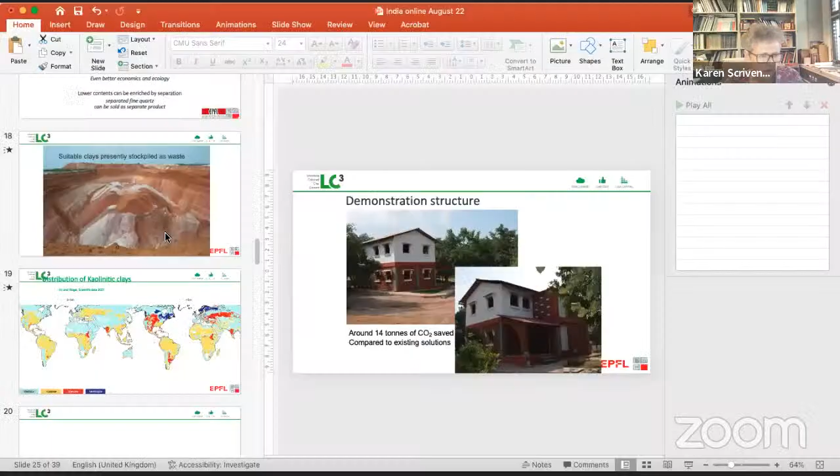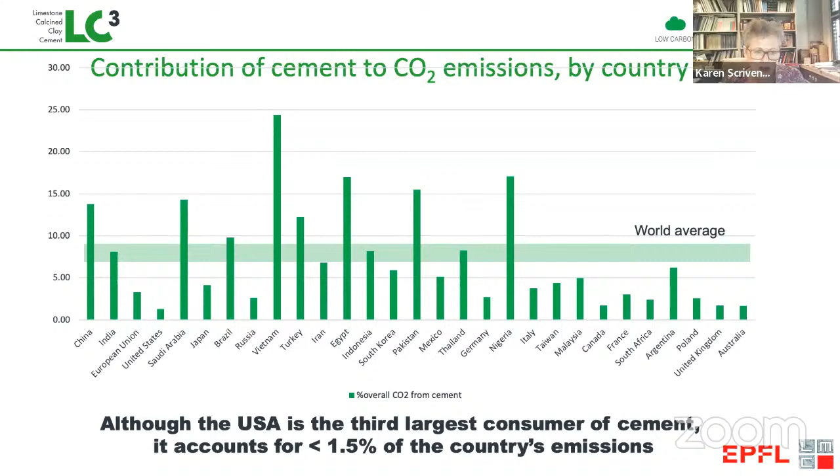So today, if we look at how much CO2 is coming from cement in different countries, we see India is pretty much near the world average of about 8%. But if this increase continues, and if, on the other hand, India is successful in reducing the CO2 intensity of its energy, then this share is likely to increase. Now, we can't do away with using cement in concrete, because concrete is by far the most used material, more than all other materials put together.

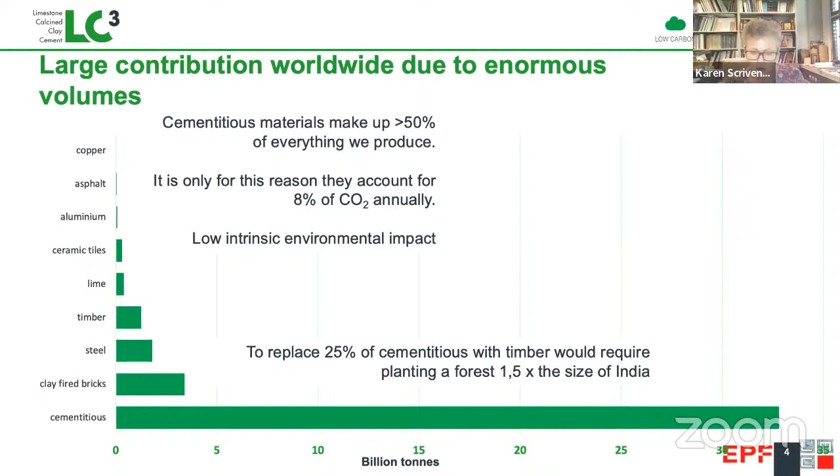If we look at timber, this really cannot go anywhere. If we wanted to replace just 25% of cementitious materials with timber, we'd have to plant new forests 1.5 times the size of India, and of course wait 30 years for them to grow. And on a per ton basis, concrete is one of the materials that has the lowest embodied energy and CO2.

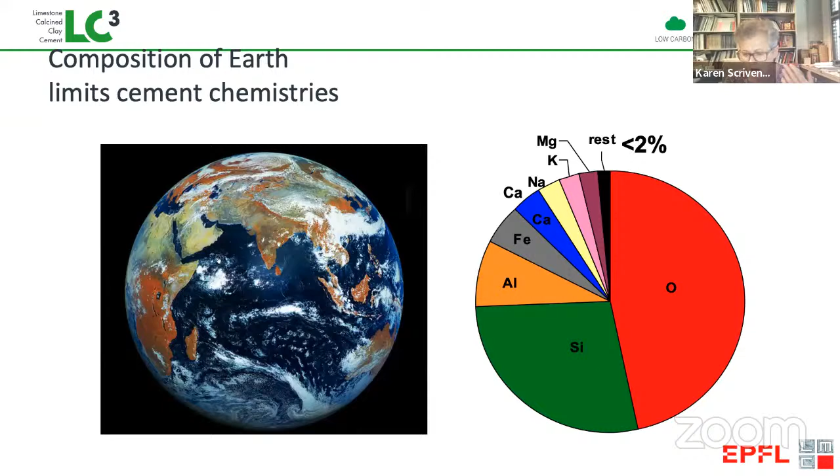Now, we're ultimately limited by the composition of the earth. Just 8 elements make up more than 98%. That's oxygen, silicon, aluminium, iron, calcium, sodium, potassium. And because of this, we really are limited to producing Portland cement, because Portland cement is based on very abundant raw materials and can be produced in the quantities we require.

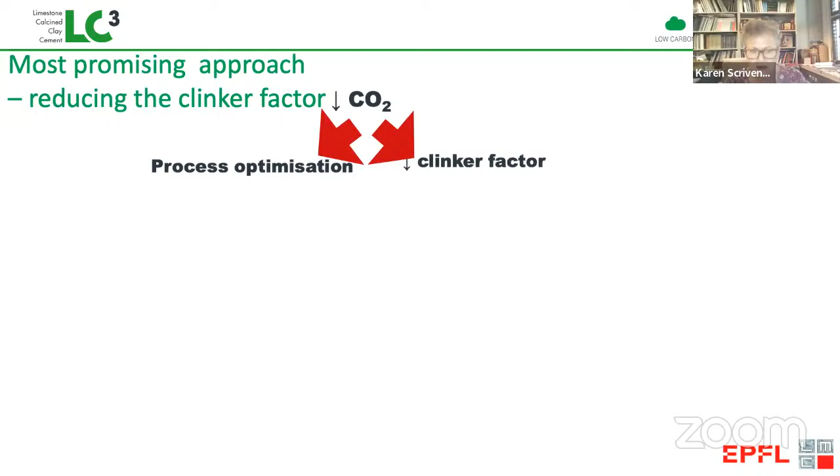So the most realistic option, after of course we have optimized the process, which is largely done in India, is to reduce the clinker factor by replacing the clinker we produce in the cement plant with supplementary cementitious materials. This can be fine limestone, fly ash, which comes from burning coal, slag, which comes from producing iron in blast furnaces, and calcined clay. Now, these two in the middle, fly ash and slag, are the problem because, of course, burning coal is the major source of CO2. And most countries, including India, have committed to phasing out use of coal in the next few decades.

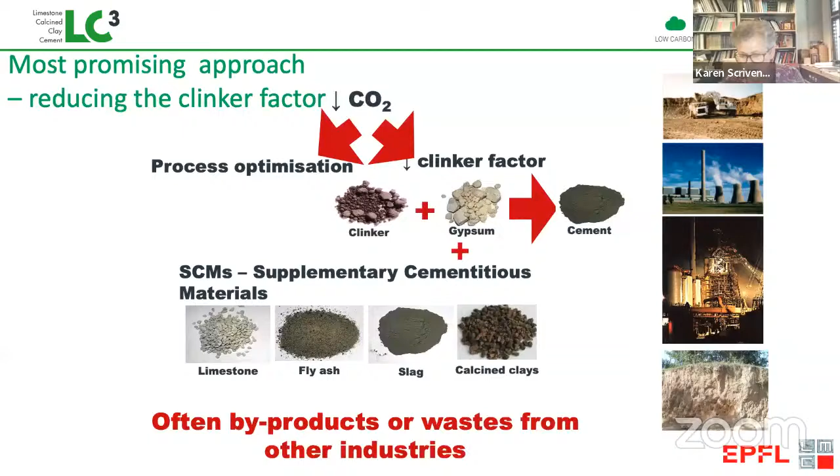Similarly, steel is a very CO2 intensive material, and CO2 will be reduced by more recycling, less reduction of primary iron. And we can see even today that the amounts of slag and fly ash worldwide are very limited compared to the demand for cement.

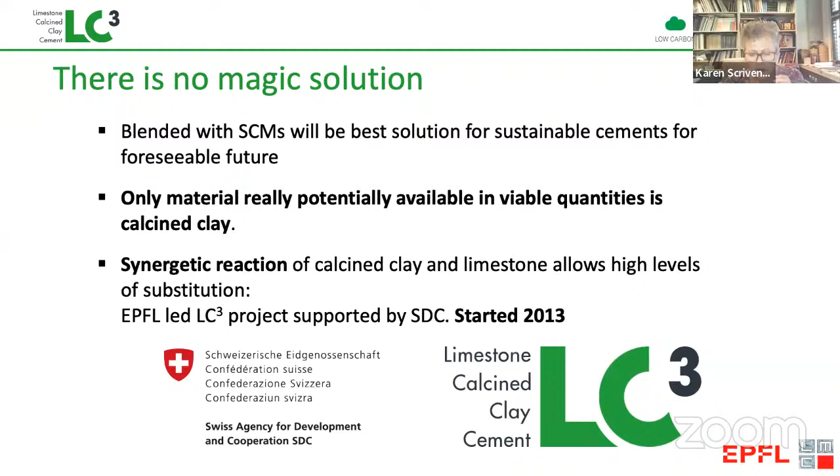So the materials we have that can take this technology of substitution further are really limestone. Limestone is abundant, but the problem is when we go to additions more than about 10%, it just becomes a diluent. And what is really the thing that can change everything is clays, which can be calcined, which become very reactive material. So this was the idea behind the LC3 technology, and particularly the discovery that when we put calcined clay and limestone together, we can get very high levels of substitution.

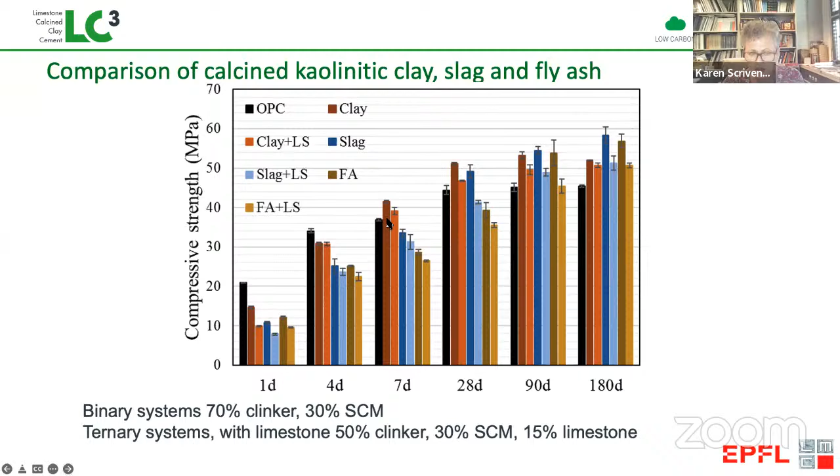In this slide, we're comparing calcined clay with slag and with fly ash, alone as pozzolans and also in combination with limestone. And the key message you can see is that in the long term, all these mixtures come to very similar strength, but the mixtures with calcined clay, which are in the red, are achieving that strength much, much more quickly than either the slag or the fly ash.

So the LC3 project is led by EPFL. In India, we have the partners from IIT Madras, IIT Delhi, and TARA, and also we have partners in Cuba. So the first question we tackled, I think you'll hear more today from Suman, is what kind of clays are suitable. We have 3 basic clay types. And what we want is to have at least some of this mineral kaolinite.

This kaolinite has what's called a 1-to-1 structure with 1 layer of silica and 1 layer of alumina. And this means when it's heated in the range of 800 degrees, both the silica and alumina are available for reaction. And it's very important to stress that we don't need to have very high purity metakaolin. We certainly don't want to have material from agriculture regions. This is not at all suitable, but there are many, many kinds of clays available which can be suitable. We've now tested more than 70 clays from around the world.

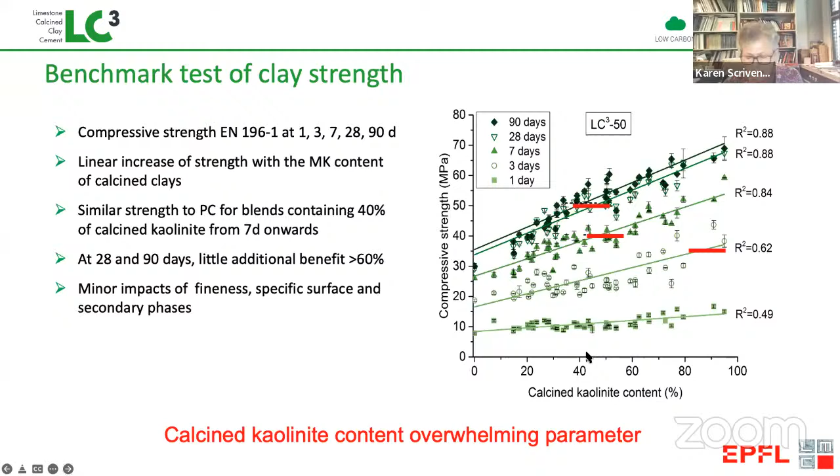We see in terms of strength development that this kaolinite content is the key factor. And the red lines on this graph indicate the reference strength of the plain OPC. You can see that by 7 and 28 days, we only need a kaolinite content of about 40%. So ideally, you have 40 to 60%. These kind of materials can be available as wastes from other mining operations. This shows reject clays in India, which are good quality for making cement.

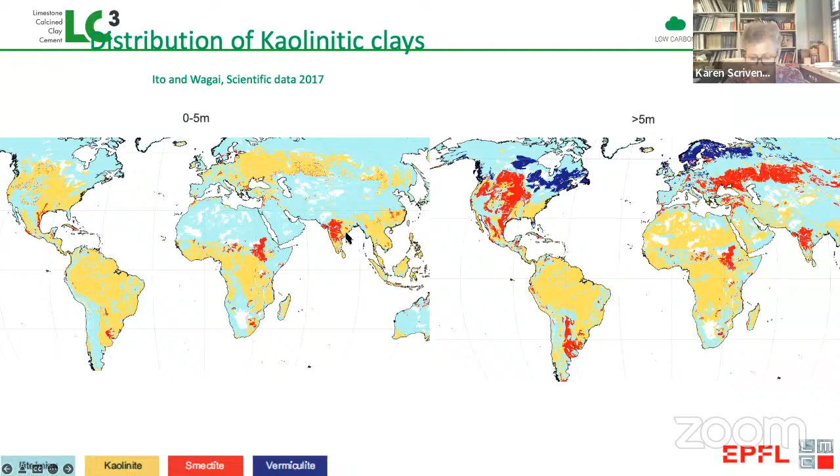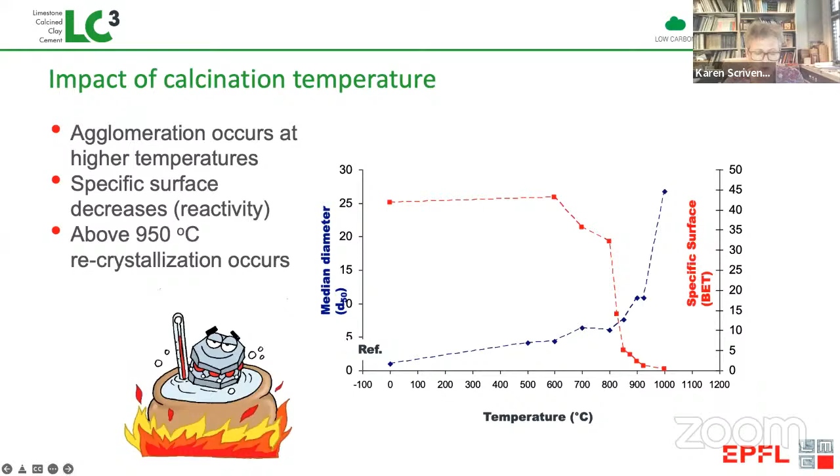And worldwide, we have these clays really nearly everywhere. Everywhere you see this kind of yellowy color, including most of India, you will have these kind of suitable clays. For the calcination, you need to calcine in this range, 700 to 850. If you go higher, then you tend to get a decrease in reactivity due to some sintering. But you can do this calcination either in the rotary kiln or in flash calcination. Both equipments have their advantages and disadvantages, but we really don't see any major impact on reactivity.

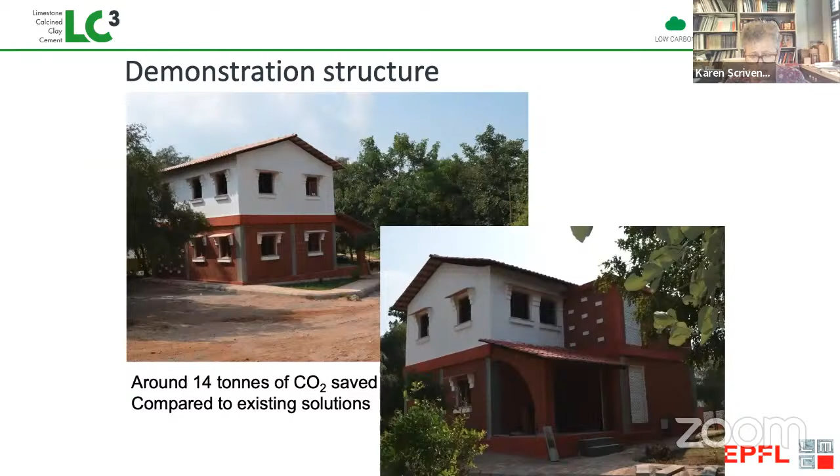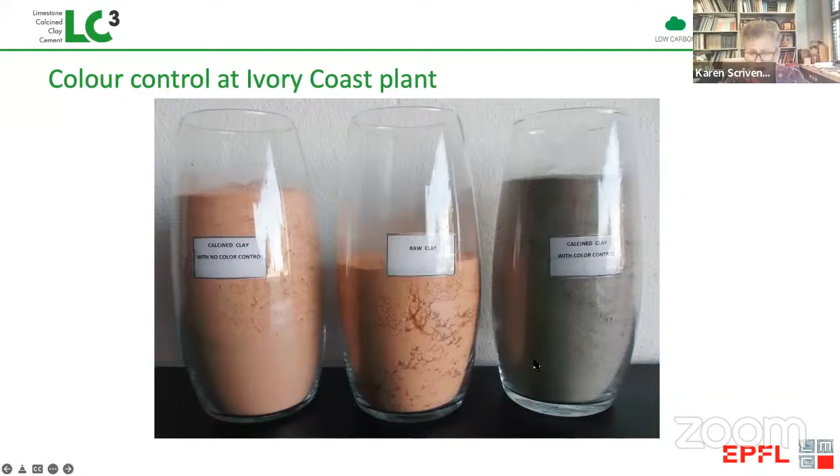So this was the small kiln in India we used for our first trials. This led to the construction of this demonstration house, which is still performing well after 8 years now. And this shows you a greenfield plant for the calcination of clay, which has been constructed in the Ivory Coast. What's particularly interesting about this plant in the Ivory Coast is that there it's possible to control the color of the clay with a quite simple technology coming from the brick industry. You see, this is the red clay, but if you don't want to have red cement, you can quite easily, during the calcination, transform this clay to this normal gray color we associate with cement.

So one of the key advantages, I'm just going to show one graph, is the chloride resistance. This shows the chloride penetration into samples. We see the black line here as the reference Portland cement. These red ones are the mixtures with slag.

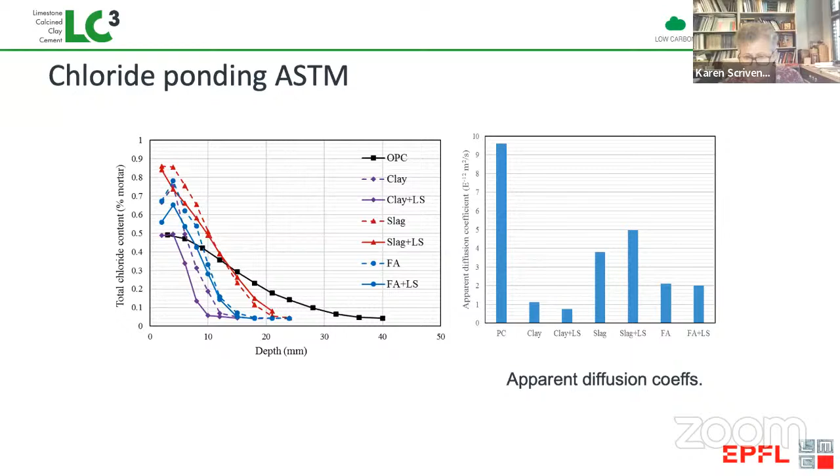The red are with slag, the blue are with fly ash, and here the best of all are with the calcined clay. And I think Manu Santhanam is going to say more about these performance criteria.

So just a short word on how this LC3 technology can contribute to India achieving its goals under the Paris Agreement. Even though fly ash is very abundant, it's unlikely to increase in the short term. And in the long term, it will certainly decrease because India as well has committed to phasing out use of coal. Slag is and will remain very limited, and therefore calcined clays are the only solution we have to increase supply without increasing the clinker factor.

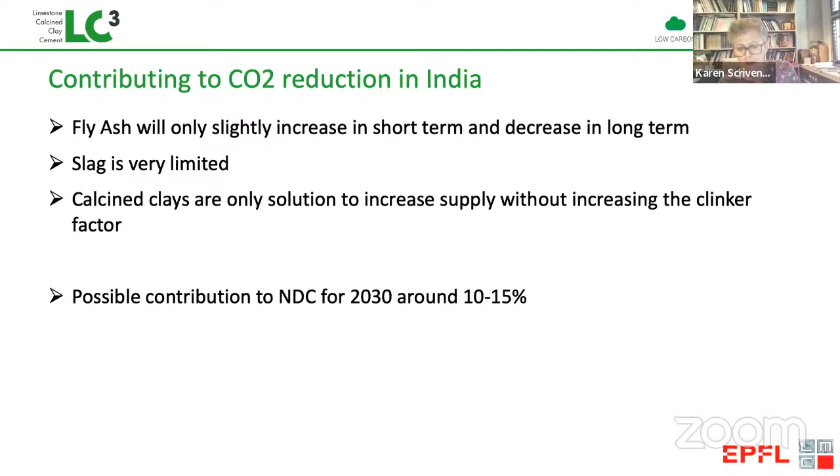And I think someone is going to talk more about this, but the kind of contribution we can imagine to the nationally determined contribution for 2030 is around 10 to 15%, which is really very significant. On a worldwide level, what we see is the current average level of clinker substitution today is only around 20%. And this is due to the limited availability of slag and fly ash.

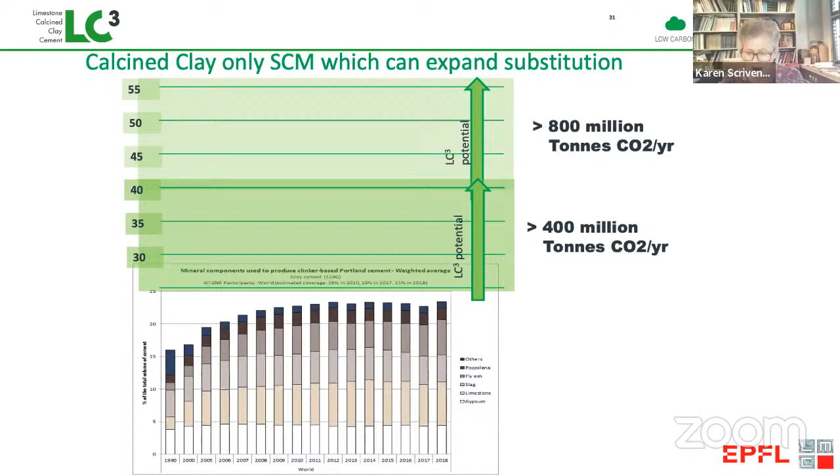If we remove this limitation, if we increase the supply of SCMs by having calcined clays, we can easily imagine to go to a substitution level of about 40%, which would be equivalent to saving worldwide 400 million tons of CO2 per year. And I think on a horizon of something like 2050, we actually could go much further than this to an average substitution level, maybe up to 55%, which would be equivalent to 800 million tons of CO2. So this single technology is one thing which has the biggest potential to reduce CO2, and it can be done at scale and in the very short term.

Financially, we made this detailed report. You can download it online. We can see in terms of operation, the price compared to the OPC reference can be much lower, and particularly in a scenario of a grinding plant. So if you install a grinding plant close to a source of clay, this can really reduce your costs.

So some of the challenges, which I think the team in India can help you with, are, first of all, to find the right clay, evaluate the financial feasibility, look for calcination equipment, because now all the major suppliers are supplying suitable equipment, and how to use it in concrete. There are some issues about workability, but we do now have a good range of superplasticizers, meaning you can achieve good concrete.

And recently, I think we finally got LC3 into the cement standard in India, but there's still work to be done in terms of the concrete standards and codes. So India is really our flagship in this project. It's the country we've been working with the longest, and we hope now the standard on the cement is finally done. We're going to see the fast uptake here and many successful applications.

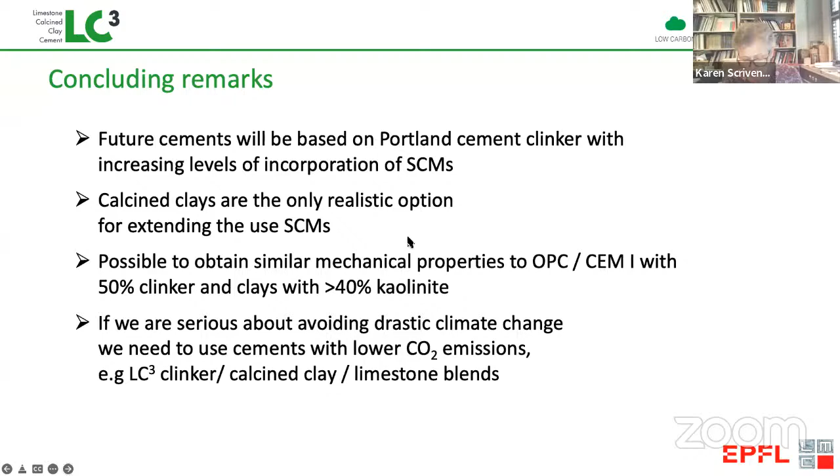So just to conclude, I hope I've managed to convince you that this is really the future of cements. You know, we don't really have any viable alternatives. We can't produce on the same scale as Portland cement, but we can substitute with SCMs. And in terms of SCMs, calcined clays are really the thing we have that can take the substitution levels to higher amounts. And to get similar properties even to OPC, we can do this with only 50% clinker and clays with only 40% kaolinite. So I think this is a very important technology if we're serious about reducing CO2.

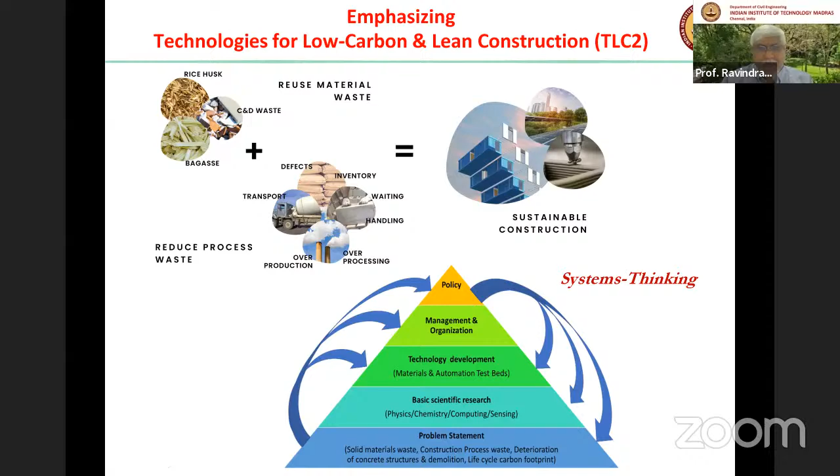And our approach always has been to look at the whole life cycle. We are looking at the raw materials, the supply chain, going on to design. We have also done some demonstrators. We've done one building on LC3 also, and Professor Manu can give more details if needed. Our emphasis is very much on durability. I think sustainability cannot be thought of without durability. And then we are also looking at the end of life cycle and the reuse of materials.

So we are looking at a test bed where, if there is a material that needs to be looked at, we can get the fundamentals and see how to take it into practice so that sustainability is always kept in mind. So when we talk about sustainability, the impacts we have generally considered are carbon dioxide emissions and embodied energy. There are more impacts, but for cement and concrete, these are the two crucial ones that we have to keep in mind.

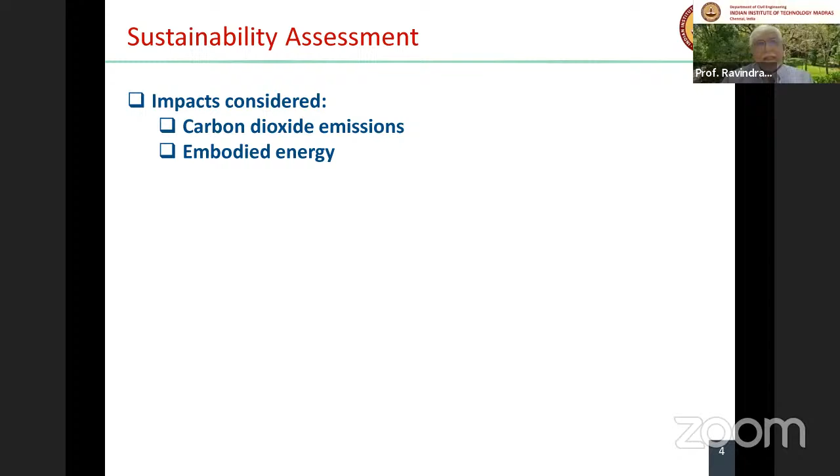And remember also, energy also means cost. The more fuel we need, the cost also increases. So it is not only in terms of sustainability, environmental impact, but also in terms of cost that we have an impact on when embodied energy decreases.

So when we use a tool called life cycle assessment, which is very well established all over the world, we have to define the system, because we can look at only the plant, or only the kiln, or the whole environment. So here I will show you results on what we call ground to gate, or mine to gate, or cradle to gate. That means we are looking at all the environmental impacts from the mining up to the gate of the plant, be it the cement plant or the concrete plant.

And we collect the data directly from the plants. We are not using a database. A lot of people use international databases, and these have data from, say, Europe or Switzerland, and that is obviously not applicable to Indian conditions. So we need Indian data, and we put in a lot of effort going to plants. And I would like more companies to come forward so that we can get more data from plants.

And then we convert this inventory data to the impacts, and we can also consider other things. Like I told you, durability is very important. So our framework is: we take the embodied energy, we take the environmental impact, and we also combine with strength, workability, carbon and durability to give a complete indication of the sustainability. So this is our sustainability approach, and I'll show you some examples in the next few slides.

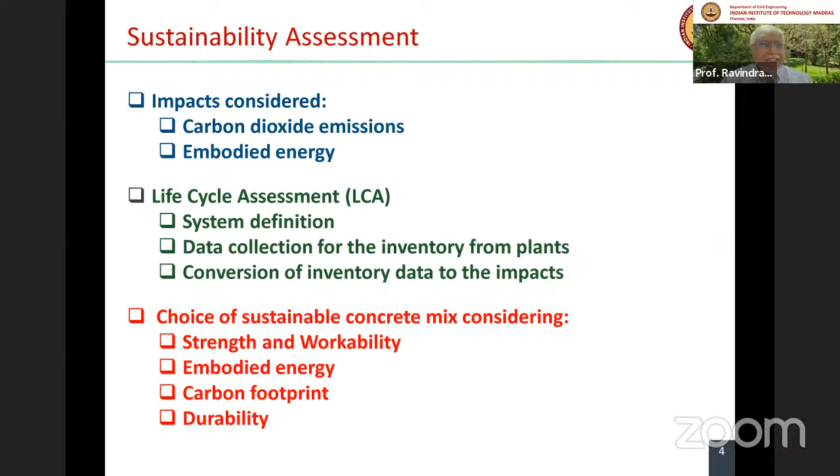So this is from a plant in Nandyal in Andhra Pradesh, where there is production of OPC, Portland slag cement, PSC, and GGBS. And I'll show you some data. And we are also going to assume hypothetically that LC3 is made there.

So this is a state-of-the-art plant, and they're already making OPC and PSC. And we are going to assume for our calculations that they are ready to make LC3 and what would be the impact comparatively of these different cements made there. We have done it for the other plants also, but I'm just showing you results for one plant.

So to start with, we have to consider all the processes that go into making cement. So this is very tedious, but it has to be done. We just cannot go blindly to some database and take it without knowing what are the materials being used, what are the processes, distances applicable to the Indian plant in question.

So this means that we have to see where the electricity is coming from. Is it from the grid or a dedicated plant? What are all the fuels needed? Because there could be alternative fuels that are being used, which would vary from plant to plant.

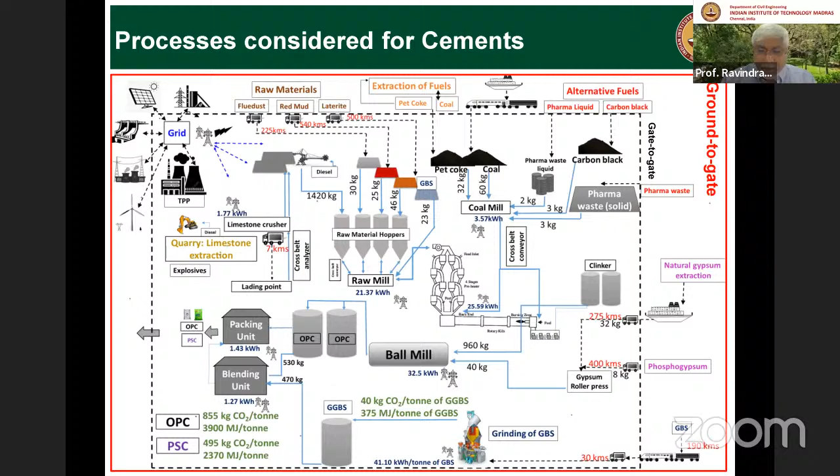So just in this plant as a reference, for every ton of OPC, 855 kgs of CO2 is emitted, 3,900 megajoules of energy is required. Okay, so that is the reference. Now we want to see what happens if you have other types of admixtures, the other types of cement, particularly LC3 being made in the same plant. So let's see the numbers.

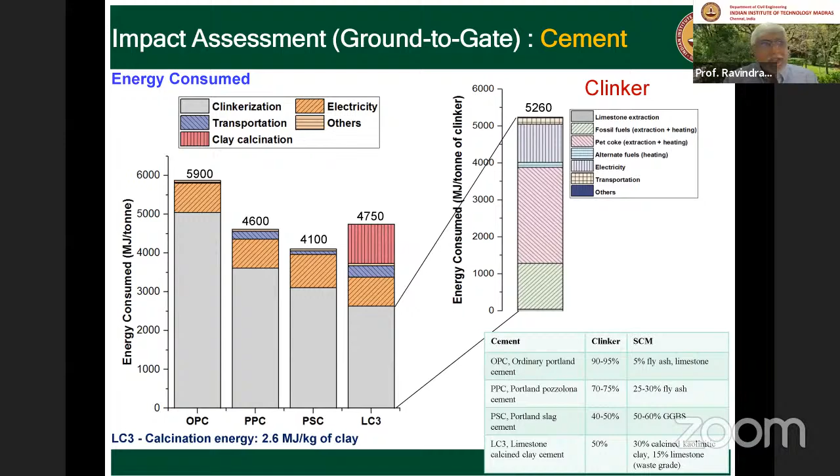With LC3, there is some requirement of calcination, which makes it comparable overall to PPC, but it is significantly less than what is required for OPC. And on the right, you have the breakup for the clinker. So most of the energy in India, in this plant in particular, comes from the burning of pet coke and other fossil fuels. And there is some part which is also coming from the electricity requirement for the grinding and so on. So clearly you see that when we use LC3, we have a huge reduction in the emissions and the energy requirement.

Let's look at concrete. So for concrete, again, we have to do the same thing. The life cycle assessment goes on a similar procedure where we have to look at all the processes. So here it means that we have to look at the cement production, the aggregate production, and water requirement, and the final mixing and transportation. Electricity mix also comes in. So again, we have to do all these calculations. We have to get the data on how much material is used in each mix and what are the distances it has traveled.

So I'll show you data for different types of concrete. I'll show you M30 concrete made with OPC, fly ash addition, and LC3. In this case, the M30 concrete required about 310 kg of the binder, of the cement, and the water binder ratio was varied to get this strength. We also made a higher grade concrete, M50 concrete, with different binder contents needed for this M50 grade. And then there is a common mix which has the same binder content, but giving obviously different strengths because the binder is fixed here. In all these cases, the slump was about 100 mm. So these are workable concretes. These can be used at the sites.

So I'll show you some results. On the left, you have the energy consumed. On the right, you have the CO2. And clearly you see that if you compare with OPC, PPC and LC3 are coming out much, much better in terms of energy as well as carbon dioxide. There is a slight increase as you increase the grade, but that is okay because you'll use less amount of M50 anyway. So clearly what benefit we see in the cement also is there in the concrete.

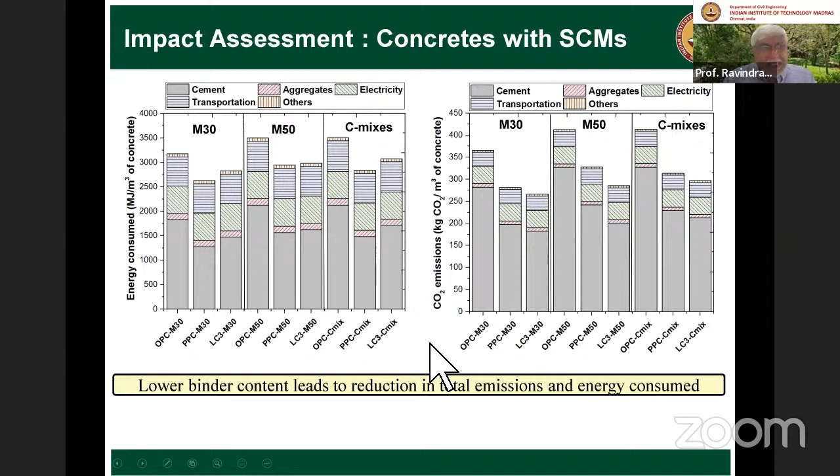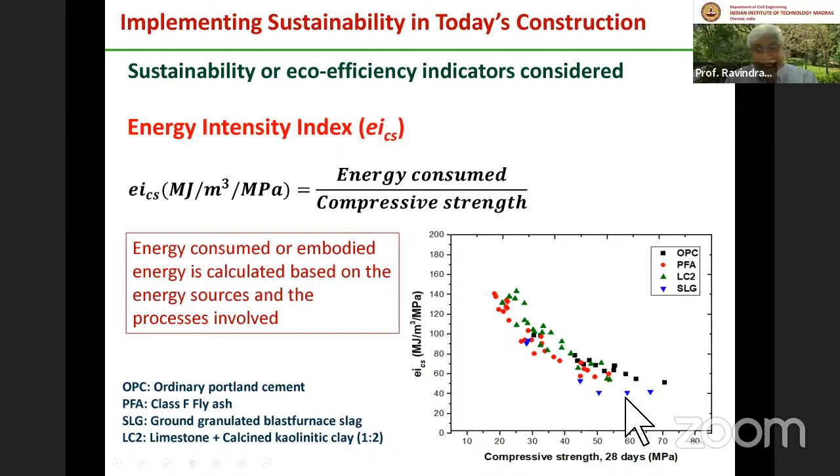So let me go on to bring in durability also. When we are talking about sustainability, I said that durability and other parameters are important. So we are considering two types of indicators. One is the energy intensity index, which combines the effect of energy and mechanical integrity. And you can see that it also reflects well the improvement in the structural level that we will see when compressive strength increases. If we look at only the energy, it looks as if a higher grade concrete requires more energy, will have more emissions. So that is why what we have done is divided by the compressive strength. So you see here that the energy intensity index decreases as we increase strength because the efficiency becomes better.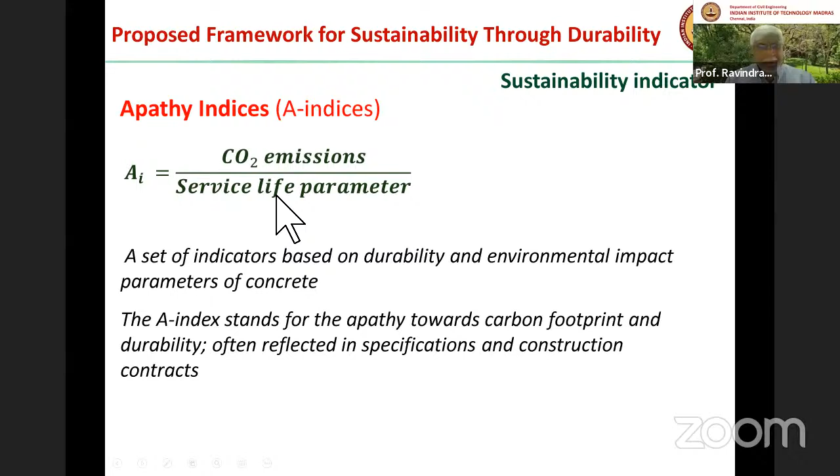Very importantly, we have defined a second set of indicators called apathy indices, which divides the carbon footprint by a service life parameter. And this could vary depending on the attack you have. So say if you have chloride attack, chloride ingress is governing the durability. Then the apathy index is the carbon footprint divided by a factor that depends on the chloride diffusion. You see the chloride diffusion coefficient here. So with this, we have brought in on one side the energy, the mechanical integrity, and on the other side, we are bringing in carbon emissions and the durability. So with this, we believe that we can see if a material, a concrete, is more sustainable or not.

So the concretes that I've discussed before are plotted here. On the y-axis, I have the apathy index. Apathy index definition is given here. On the x-axis, I have the energy intensity and the definition is given here. Whatever is going in this direction, closest to the origin, we consider is more sustainable. And clearly, you see that LC3 falls here. Out of all these, very clearly, the LC3 comes out most sustainable, followed by fly ash, followed by the OPC concretes. So if you look only at M30, all these three are M30. They satisfy your requirements from the design point of view. They're all workable. Very clearly, the M30 made with LC3 is more sustainable than the other two.

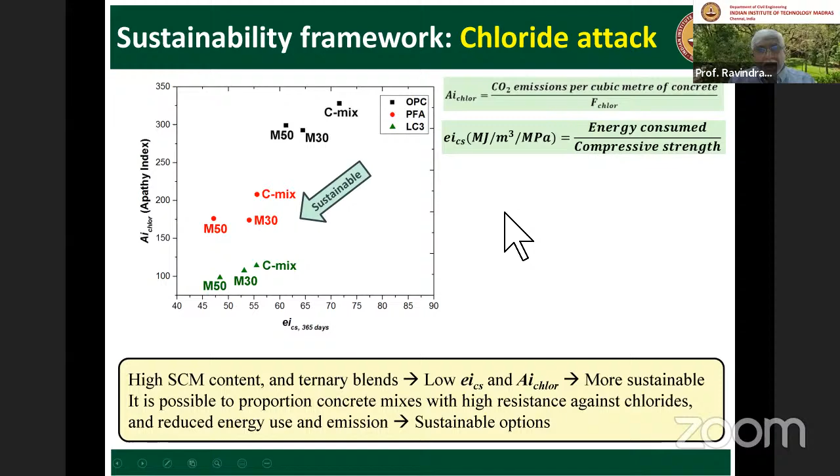So I'll stop there. Thank you very much. I'd like to thank all the cement companies which have helped. Invitation is open for other cement companies to also come forward so we can get more data and show how the blended cements, particularly the LC3, are very beneficial. Thank you, and I'll be glad to answer questions.

Thank you, Professor Gettu. Thank you very, very much. There are a couple of questions here, if you can look at this. Okay, so I'm looking at the Q&A.

So Javed is asking, do we have admixture compatibility complexities? So as I have said, Javed, we did not have any problems with LC3 concretes. We could get a slump of 100 mm very easily. So we can help further if somebody has difficulties, but I don't see any issues at all. There are admixtures being particularly developed for LC3, but I don't think that is an issue or a showstopper right now.

Then in the chat, Javed is again asking, what is the techno-commercial feasibility of using admixtures? See, again, I don't think it's an issue. The costs always vary depending on the type of admixture you use and the quantity. But when we are looking at the entire project, I don't think this is a showstopper really. I don't think that there's something that we should worry about.

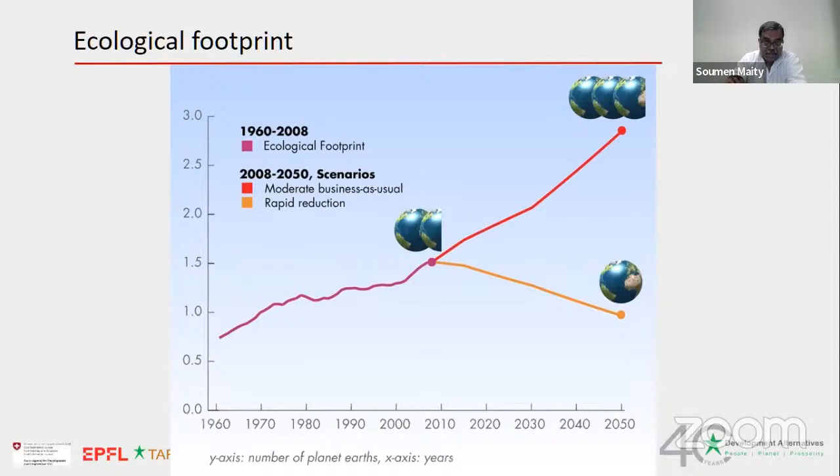Going into the status of the Indian cement industry, we are the second largest producer of cement after China, approximately around 7% of the global demand. In financial year 2022, we produced around 381 million tons of cement. It was a little bit depressing figure. We should have produced more, but due to the COVID-19 pandemic, construction was not picking up at a faster rate. As per the Niti Aayog, we have a year-on-year growth of around 12%, which is going to be sustained for the next 5 to 10 years.

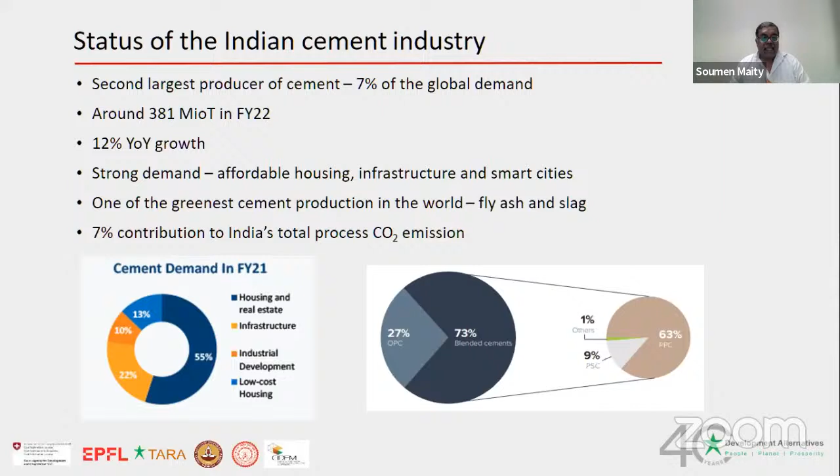So that's the status. But still, even if we are the greenest cement, we contribute around 7% of the total CO2 emissions of the country. So on one hand we are the greenest cement producer, but on the other hand, the absolute figures don't look very rosy. And this is the way carbon emissions have increased. It has been tracked from 1960; over the 1960s to 1978, 2 decades, it was very low.

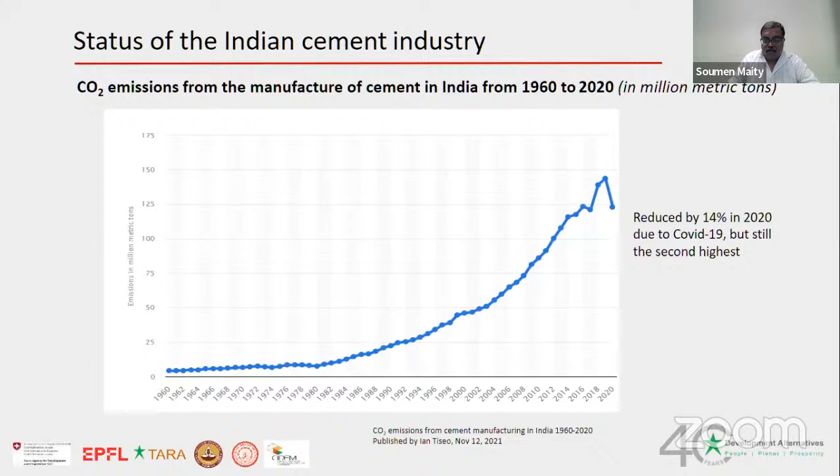So if that is the kind of condition, let us now look a little bit at the growth forecast. These are figures taken from WBCSD, the World Business Council for Sustainable Development. They had previously given higher figures, but then they have toned it down. And this very well goes with the figures of Niti Aayog, what the Planning Commission has given. Till 2035, there will be an accelerated growth, and after that, the growth will be linear.

But still, this projection is based on 3 major cement types: the Portland cement, the fly ash based cement, and the slag cement. Now, as I showed you previously, 63% will be the fly ash based or the PPC based cement. Now, if that is the situation, we'd like to point out and come to the question of, do we have enough fly ash?

Because with the emphasis not only in the country, but the whole world, on moving away from fossil fuels, India also is looking at reducing its energy demand from thermal energy to more renewable, and by 2030 roughly around 50% of energy demand will be coming from renewable resources. That's the pledge of the government. So that means that if we are moving from thermal energy to more renewable energy, then the fly ash availability is going to reduce.

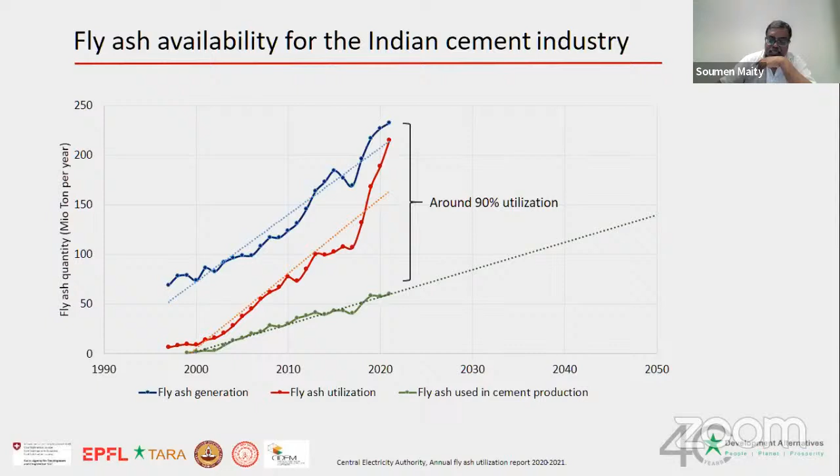Now, with the kind of emphasis by the ministries, by the government, on utilizing ash, because they have now enacted a rule, a notification, that if you are not utilizing your ash, then you will have to pay a fine of more than 1,000 rupees per ton of fly ash that you are dumping.

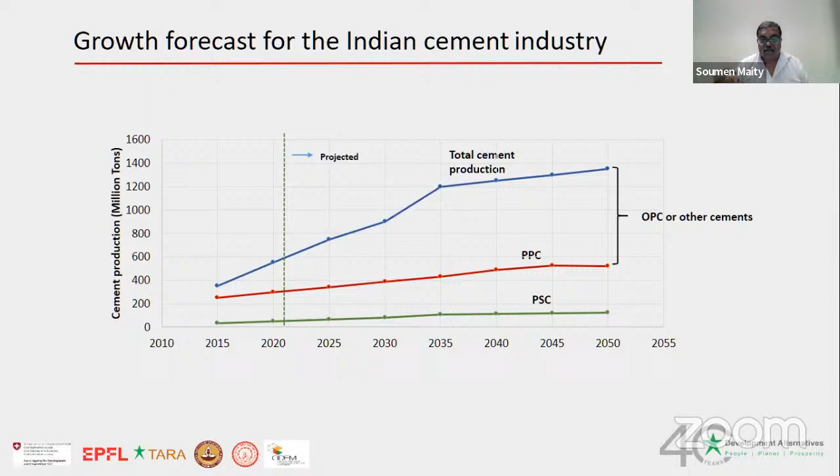And if we fall back on OPC, that means your CO2 emissions, as Professor Gettu already mentioned, 910 kg of CO2 per ton of cement. So the emission factor increases like anything.

So one of the materials that Professor Scrivener also has pointed out is available in plenty is clay. Along with IIT Delhi, IIT Madras and various other institutes, we have been working on mapping of clays across the country, and it is a surprise to us also that clay is available in massive quantities. This clay is not reported by the Indian Bureau of Mines or published with the GSI, because the data that the Indian Bureau of Mines or the ministry gives is for clays suitable for ceramic use, refractory, paint, or paper industry, which have very high kaolinitic content.

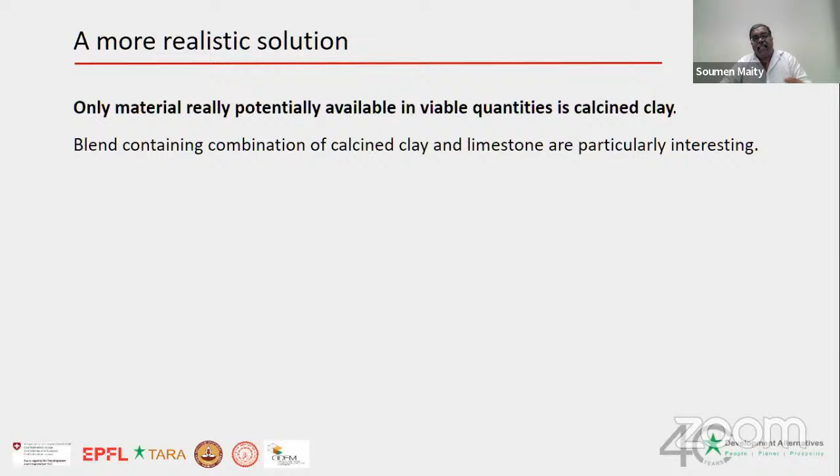The clay that we are talking about for a cement plant is any clay which has kaolin content of around 40%. And that clay is available in plenty. We have been doing surveys across the country, and till date we have not failed in looking for this. So a blend of calcined clay and limestone, as Professor Scrivener pointed out, is very interesting, and that brings us to the question of LC3. Work is not only in India, but it is going on across the globe.

And we are working not only with cement companies, but also with government agencies on standards, working with cement companies in undertaking clay feasibility studies: whether you have clay, where it is, and whether it is suitable for use in cements. And then small pilot scale demonstrations and evaluating the quality, including the kind of sustainability analysis that Professor Gettu has also mentioned.

This is a more realistic solution of how we think we are going to grow. And mind you, I'm saying that PSC is going to remain. The Portland slag cement is going to remain; nobody will be able to replace it. LC3, with the standards being published in the next couple of months, is going to pick up. Initially the rate will be slow, but within the next 10 years it is going to pick up, and then it is going to remain stable.

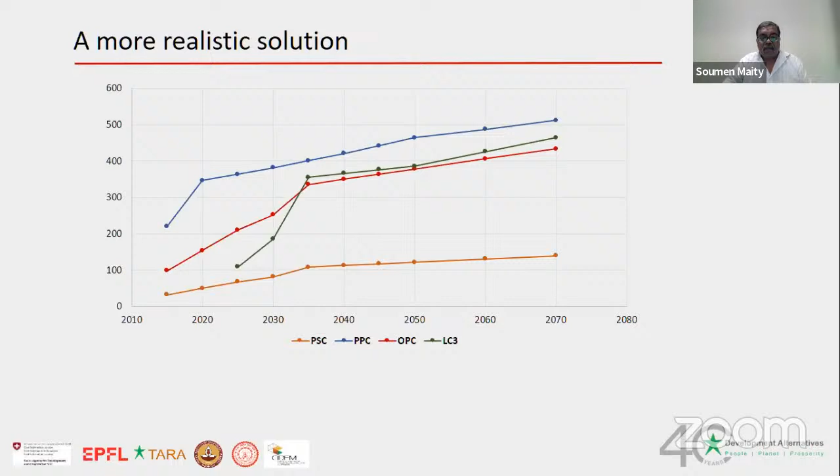Fly ash-based cements will be there. LC3 will replace some amount of OPC, and in certain cases, yes, it will be a preferred choice of cement companies instead of PPC. So these are the growth projections that we see. And if that is the situation, then we will be contributing around 10 to 15% of the NDC targets that the government has set itself.

Now, last slide, what are the sustainability benefits? Yes, if we are moving towards LC3, we don't have a choice. Either we do fly ash based cement or we move into LC3. Fly ash is not there, so we don't have a choice but to move towards LC3, and it is becoming critical. It will be critical in helping the country to meet its NDC targets, both in 2030 and beyond, 2070, where we have committed that we are going to go carbon neutral also.

LC3, of course, always it is low carbon. It has a potential of reduction of around 40% CO2 emission. And in certain cases, what people have also reported is that it can even go beyond 40%. Because when you are calcining the clay, as a fuel, if you can use renewable biomass, because the temperature is low, around 800 degrees centigrade. We have done trials with it. We were successful in using waste biomass. And if you can use that, then the amount of emissions is also going to reduce higher than 40%, and you can save more than that.

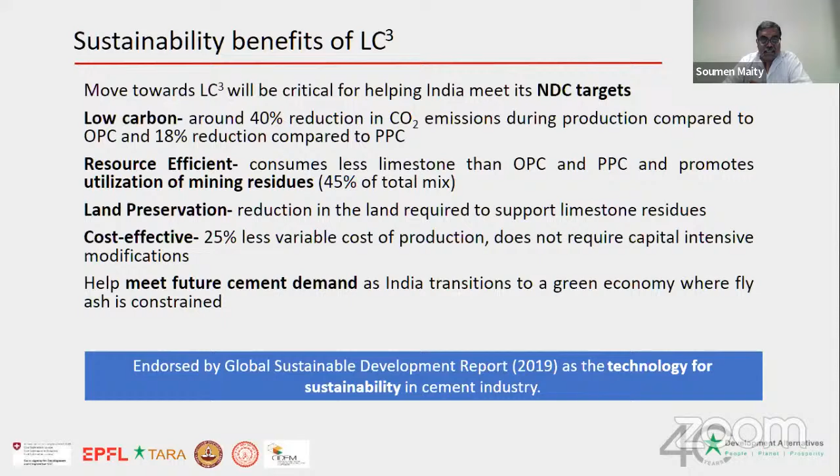For the companies, and that's a kind of question that I also had, what is the incentive of a cement company to go into LC3? Because cement companies are basically there to do business. Now, if we can save CO2 emissions, and if it can also be traded for carbon credits, India now has a carbon trading platform. If you can trade it for carbon credits, then at least the companies gain financially. Some sort of green financing needs to be available to small and medium companies for adopting greener or cleaner technologies.

And we need to work on the market imperatives. Right now we have worked on the supply side. Now we need to work on the demand side, where we increase the visibility of LC3. Who is going to buy, especially among the architects, the builders who are going to use it, and including LC3 in all the green rating systems that we have. In terms of the government, well, the LC3 standard has been approved, but now we need to fast track the publication of this. And we need to work with the government on notification of LC3 in public procurement and in public construction.

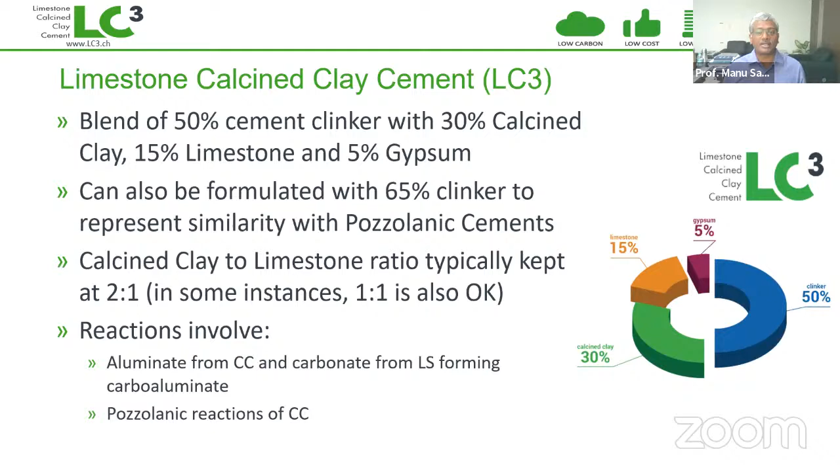They form additional compounds like carboaluminates, which are very useful in filling up the pores and ensuring that you have a very low permeability in the concrete. Then, of course, the calcined clay, like any other pozzolan, like fly ash or silica fume, can continue to react with calcium hydroxide and lead to the formation of calcium silicate hydrate, the typical pozzolanic reaction that you expect.

Now, with LC3 concretes, we've had years of research. Overall, from IIT Delhi, Madras and TARA together, we've produced data in India for nearly 8 years. And with this data, we are quite confident that LC3 performs excellently in chloride environments, even better than fly ash and slag. The main reason is the composition of the hydrated products and the small size of pores that we have in LC3-based concrete.

So based on this, we have concluded that LC3 is an ideal choice for a marine environment where we expect a lot of chloride-related problems, especially corrosion. The current study was to look at the use of LC3 in reinforced concrete structural elements of a small shed which we have constructed in the Central Institute of Brackish Water Aquaculture. This is very close to the coast, only about 400 meters away.

And we wanted to monitor the compressive strength and durability of concrete, which is only cured for about 7 days on site and then exposed to the natural conditions. We are continuing to monitor this over a long period of time, and this will continue for nearly 5 to 10 years.

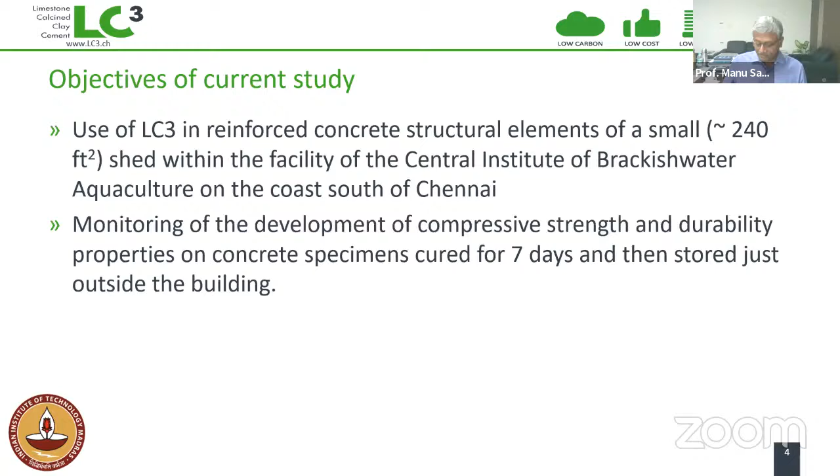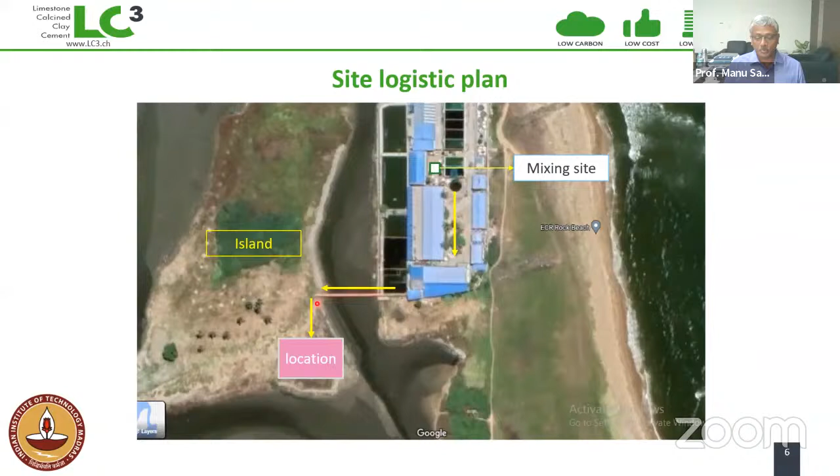So when it rains or when it's high tide, you get a lot of water here, and the entire site becomes inundated with salt water. So you can imagine that the conditions are quite severe with respect to the exposure that you have for the concrete structure. Now, as far as the site logistic issues are concerned, it was not very easy to work here.

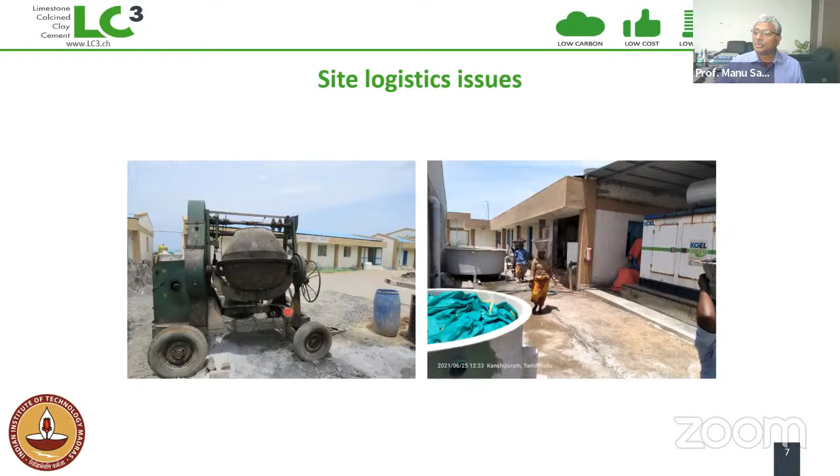As you can see from this picture here, we were using a very rudimentary type of concrete mixer, a basic tilting drum type mixer. The site where we had to do the concrete production was quite different from the actual location where the concrete was to be delivered. And you can see people here carrying concrete in small containers from the point where we were mixing to the site, which was located slightly further away. We had to actually cross this bridge.

So the site where we mixed the concrete was somewhere around here. We had to take the concrete on foot across this bridge to this location where you can see that building, which is completed. So overall, the transport time, not by a vehicle but by people carrying containers of concrete, was about 20 to 25 minutes.

And many instances with LC3 concrete will tell you that workability retention with calcined clay-based concretes is sometimes a challenge. You have to design for it. You can do it, but it's quite challenging. So we had to ensure that we had adequate workability at the time of delivery of the concrete at the location.

You can see the kind of concrete that we produced. We had a fairly good slump, about 110 millimeters after 2 hours. So we designed the concrete with a sufficiently high superplasticizer dosage to achieve the right level of slump. You can see the final site mixture design was a little bit different than what we started off with in the laboratory. That's because of these challenges that we had with the transportation and so on.

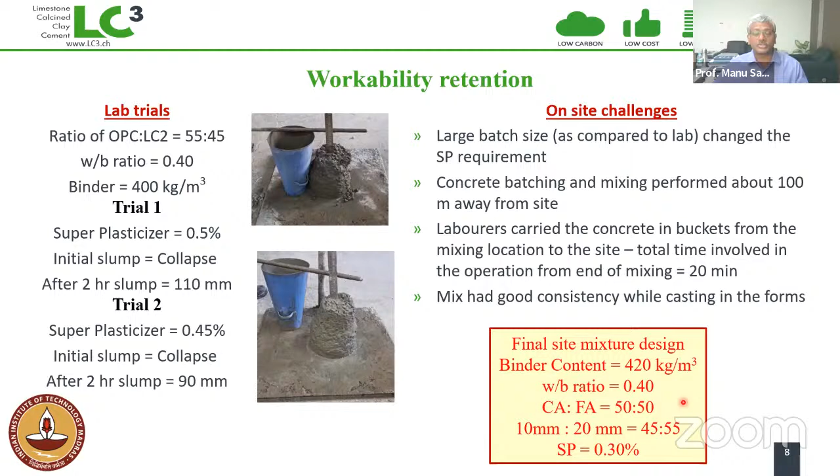We also have concrete specimens that have been stored alongside after 7 days of curing, and we are taking specimens from here, bringing them to the lab and testing them from time to time. As you can see, up to 90 days, all the tests are really good in terms of very high resistivities. You also get very low chloride permeability as measured by the RCPT test, and an extremely low chloride migration coefficient, which are typical of high performance concrete.

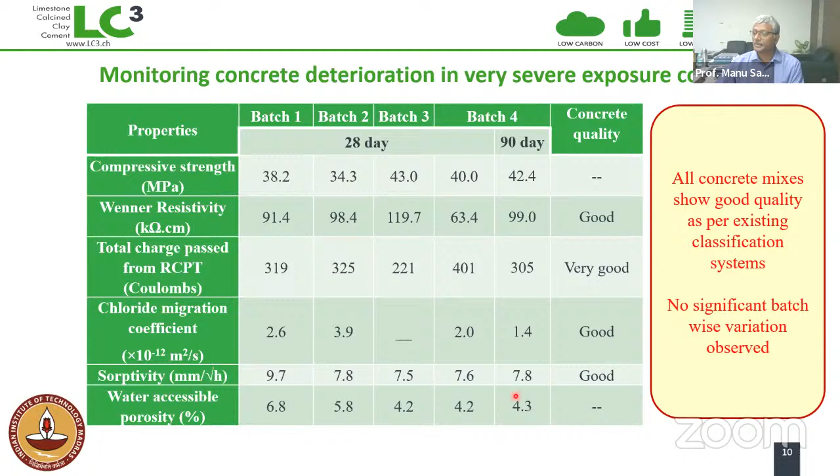Again, these are samples that are stored on site. We brought them back to the lab and tested them at 28 days. As you can see, obviously, they are producing results that are excellent.

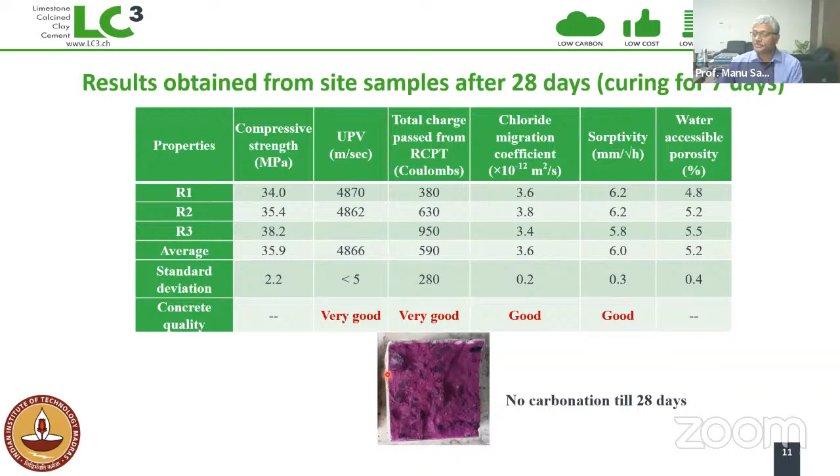And very early stages, we also did not get any carbonation in these specimens. Now, there's another site where we actually used LC3, and this is a very different site. It's actually a highly controlled concrete manufacturing site where they're using concrete to manufacture tetrapods to make this breakwater structure. The breakwater structure is going to be nearly 7 kilometers long.

So here, it was a slightly different application. And you can see the number of tetrapods that they have in this site. It's a stacking yard. The tetrapods come in different sizes, 2 tons to 20 tons, very large variation. And the tetrapod is expected to be placed in this location where it's going to be subjected to a constant splashing of the seawater and chloride intrusion. So we will obviously monitor the stability of this material from time to time to ensure that we are getting the best performance out of these LC2 tetrapods.

Here, again, very vast amounts of concrete are needed. You can imagine a tetrapod of 20-ton size, how many cubic meters of concrete it would take to really fill up that 20 tons. So 1 cubic meter is about 2.5 tons. So there's about 8 cubic meters of concrete in 1 tetrapod. And so many of these tetrapods, if you have to have a 7-kilometer long breakwater, you can imagine the extent of concrete that is required and amount of cement that can be saved by utilizing something like LC2 or LC3.

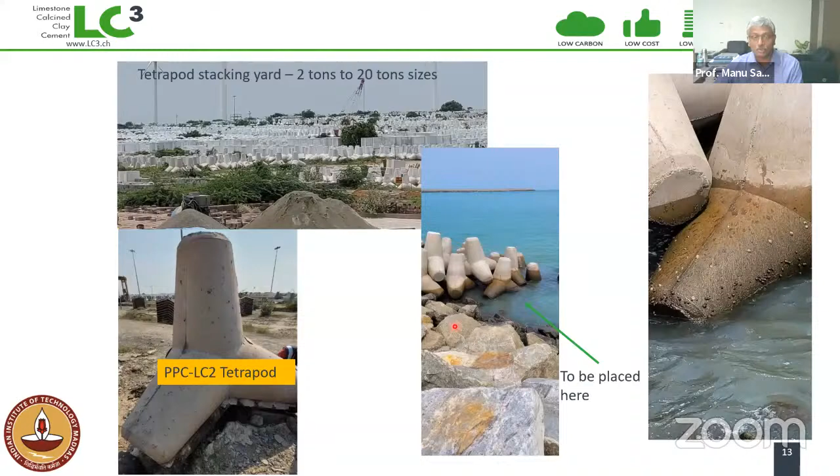So in this case, we used LC2, which is a combination of limestone and calcined clay. And here, the cement which was being used was actually a Portland pozzolan cement, because they had some issues with overall heat of hydration. And because of that, PPC was being used on this site. So in fact, here, our cement combination is cement, fly ash, limestone, calcined clay. It's actually a quaternary combination. We have 4 different types of cementing materials present inside. 350 kilograms of cement and free water of 140, which leads to 0.4 free water to cement ratio.

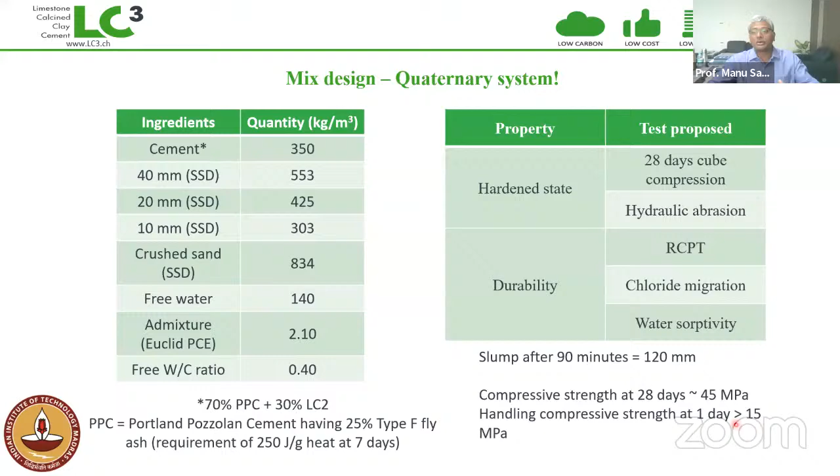And with this, of course, we are monitoring various different qualities of the concrete with time. And compressive strength at 28 days that we obtained was about 45 megapascals, much more than their requirement of 37 megapascals. And even at one day, sufficient compressive strength of 15 megapascals was available, because that is required to remove the molds and then handle or lift the tetrapods and bring it to the stacking yard.

So just to conclude, LC2-based concrete or LC3-based concrete can be a viable alternative for large-scale construction subjected to chloride exposure, very severe chloride exposure, and even in site conditions that demand long workability retention. In both those sites that I showed you, we got very good retention for at least 2 hours, and that was good enough to actually execute those projects. There are obvious choices where we don't really have a problem of workability retention, for instance, pavements, and even in 3D printing, where actually the loss in workability can be a very positive aspect.

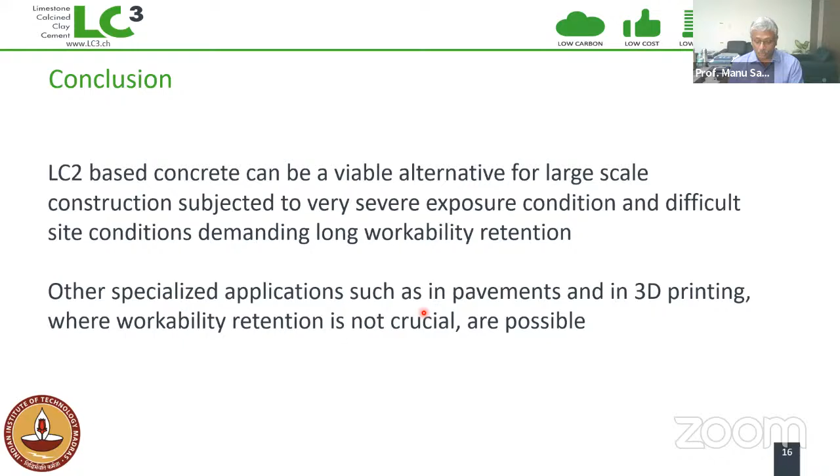And I can show you some examples of 3D printing with LC3 concrete. As you can see, the concrete with LC3 can be printed fairly quickly without really stopping, and it provides an excellent buildable mix, which is able to produce 1 meter tall columns in 20 minutes. And that's what we had done with LC3 and 3D printing here. You can see with LC3, we are also able to increase the aggregate amount in concrete which is being 3D printed. So that's a very big positive with LC3-based systems.

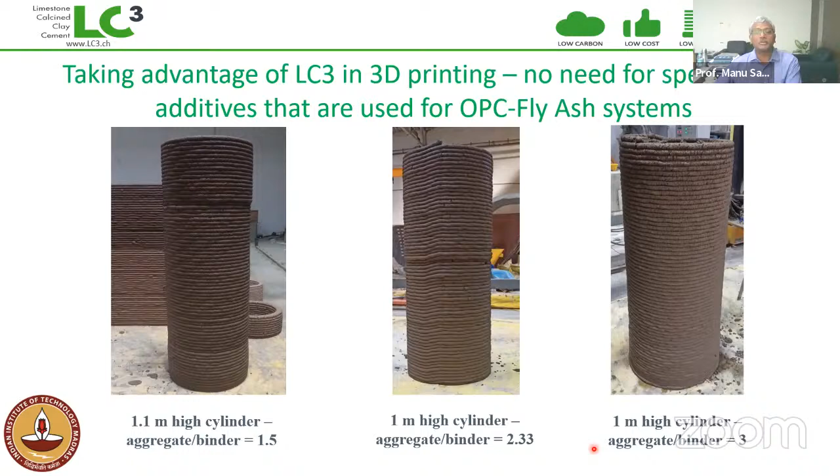So again, this is just an additional example of where LC3 can be applied, but primarily we are obviously concentrating on looking at LC3 and chloride-related environments. That's where the most potential with LC3 can be derived.

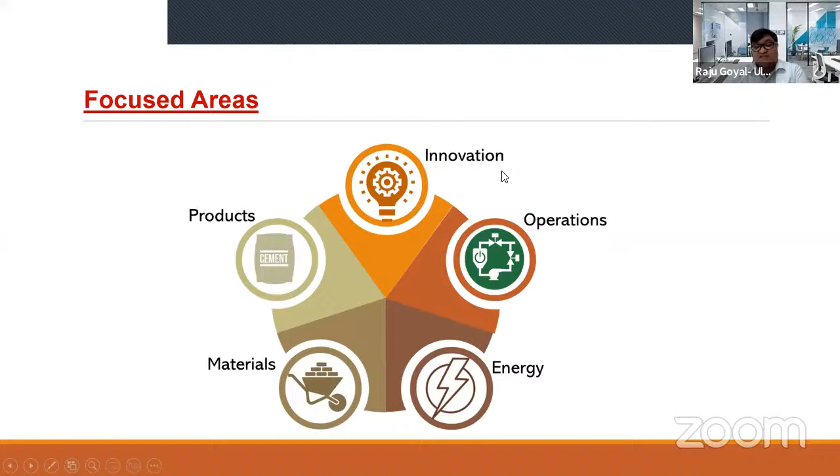And then last point, I'll discuss the innovations, how technology can take place in our operations. Because if I say that, I may be wrong, my cement colleagues may not be happy or not agree with me, but in the last 100 years cement production technology has not changed. Yes, there are small changes, preheater to calciner to different blending technology and things, but no significant shift has happened from a technology point of view. So innovations can play a very important role in our sustainability journey.

So let's talk about our operations improvement. The cement industry in India is much ahead of world standards or operations outside India. They have achieved significant efficiencies in terms of power, material, electricity consumption and things. But still, I believe production and productivity can be further improved by using digital solutions. That's the reason I put it as the first point, because a lot of data and information is available on how to use digital solutions to improve our overall productivity, which will definitely have an impact on our CO2 footprint reductions.

Heat consumption: India is doing much better than the rest of the world, but still there is an option to optimize further by using different technologies, equipment and available solutions to reduce the heat consumption and power consumption of our cement plants. Clinker factor: there are two parts to this, one is our standards, one is our industry. Clinker factor is one area where the industry is doing quite well, but given the availability of raw materials and additive materials or SCMs, this has become an area we need to look into. And we discuss the alternative materials in the second part.

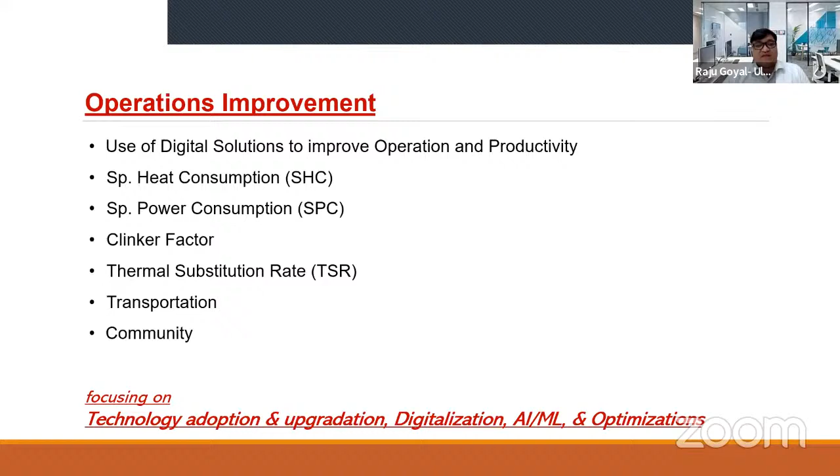So that's the reason I put in the operational improvements. So focusing on technology adoption, upgradation, and digitalization, AI and ML, and optimization takes a very important part to reduce our CO2 footprint in the operational space.

And adopting green energies, as I discussed, because we need significant thermal as well as electrical energy, which right now comes from TPPs or coal-fired power plants, which can be replaced by WHRS or renewable energy like solar and wind. And specific thermal energy especially has to be reduced from the consumption point of view, because the efficiency of the turbines and things can be further enhanced.

And hydrogen and battery storage is also coming up. We have to see how these can be used in replacing the traditional energy usage. Digital solutions can definitely improve energy productivity, and losses especially can be reduced. And the latest technology in higher efficiency motors, drives, and equipment can also be part of that. Especially in in-house operations, we can look into solar systems and LEDs to reduce our dependency on traditional energy.

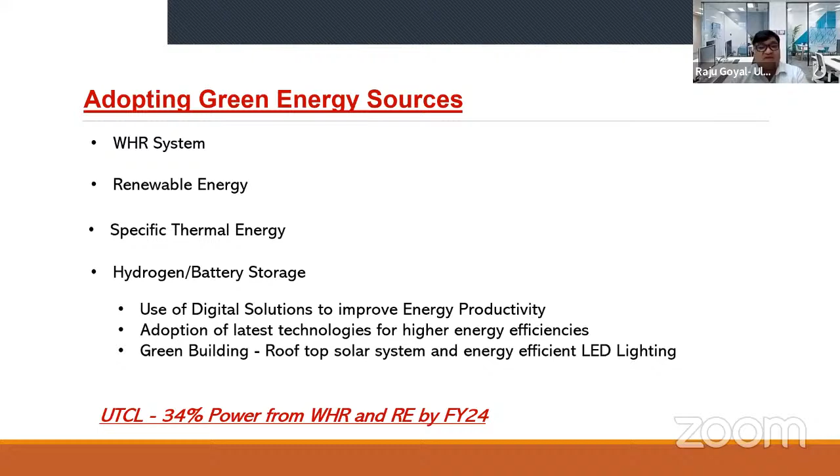So as UltraTech, we have committed that about 34% of our total power requirement will be met by RE and WHRS by 24. And this is the commitment we made for our sustainability. And then increasing the value from waste. This is, I think, one of the areas which we already discussed, I'm sure, in the previous sessions.

So corrective and additive materials. When we say corrective additive materials, because other than limestone, we need corrective materials like an iron source, alumina source, or clay source, how can waste material produced by different industries or processes be used instead of natural resources. And the ash coming out from different processes may not be directly used in cement production, but can be used in the process somewhere. How can we get to 100% zero waste, using what comes from other processes in our cement processes.

Co-processing, when I say co-processing, is all the waste coming out from different industries, pharma, agro, and our dumps, where we can use this material as a substitution for our fuel and our raw materials wherever we can as an industry. For example, red mud, copper slag, fly ash. I think this is already happening, but other materials like phosphogypsum are one of the areas where we have to see how we can use that material.

And in concrete processing, we can also look into how recycled material can be used, and how it can give the same strength and the same quality by using alternative raw materials. And whatever reject or unused material comes out from construction or demolition can be used, which can help us reduce our CO2 footprint too.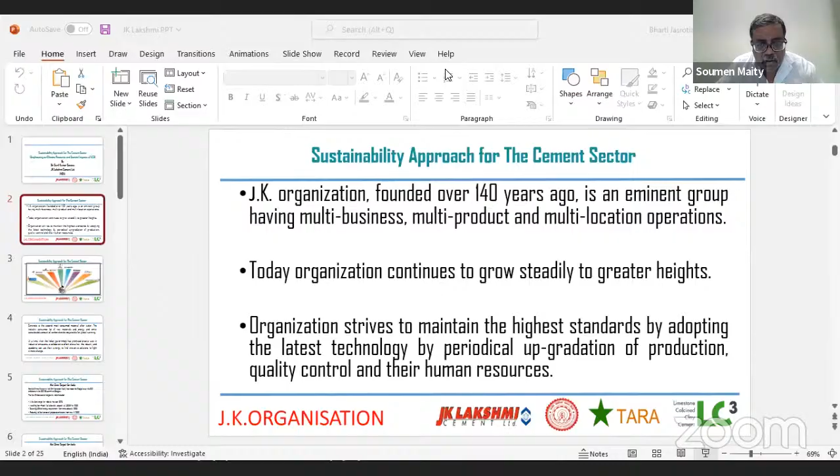Sir, can you just, एक बार interrupt करो? Can you please put it in full screen mode? Actually, Bharti is taking. Acha, Bharti, can you please put it into full screen mode? Yeah, Bharti? Yes, sir. Thank you. Yeah, this is perfect.

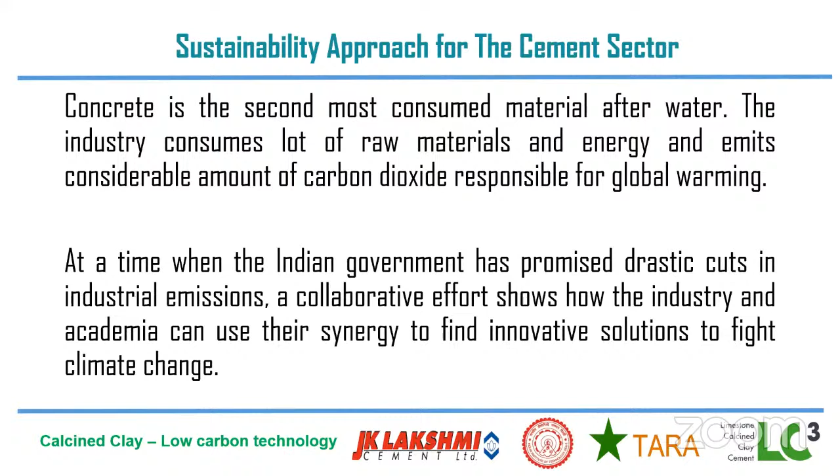So as we talked about, concrete is the second most consumed material after water, and the industry consumes a lot of raw materials and energy and emits a considerable amount of carbon dioxide, responsible for global warming. As far as CO2 emission is concerned, the cement industry's contribution is around 7%. At a time when the Indian government has promised drastic cuts in industrial emissions, collaborative effort shows how industry and academia can use their synergy to find innovative solutions to fight climate change.

And of course, the IITs and TARA have taken a lead in that area. They have done a great job. They have created awareness while having the collaboration. And Mr. Maity has done a good job as far as the mapping of calcined clay in India is concerned, which is unfortunately not available in IBM, etc., which needs to be addressed. Next slide, please.

We are talking about the net zero target for India, which has already been promised by our respected Prime Minister in the COP26 summit at Glasgow: a net zero target for India by year 2070, installing non-fossil fuel electricity capacity of 500 gigawatt by 2030, sourcing 50% of energy requirement from renewables by 2030, and reducing 1 billion tons of projected emission from now till 2030. This has already been talked about.

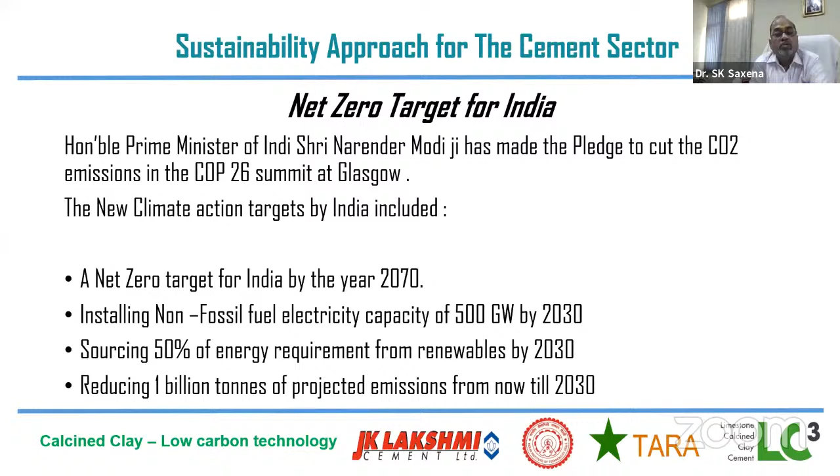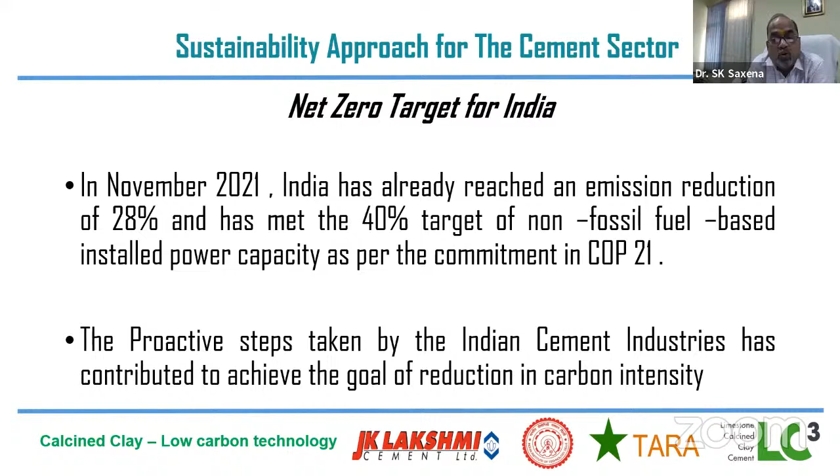In November 2021, India had already reached an emission reduction of 28% and met the 40% target of non-fossil fuel-based installed power capacity as per the commitment in COP21. Proactive steps have also been taken by the Indian cement industry, which has contributed to achieving the goal of reduction in carbon intensity, as already explained by my friend Mr. Raju Goyal.

Now, there are certain levers which will help us in decarbonization of the Indian cement industry. First, the substitution of clinker. As already explained, 63% is already PPC, and almost 7 to 8% is PSC. We are also looking at reduction of the clinker ratio in the different grades of cement, like PPC, PSC, and of course composite cement.

As far as alternate fuel and raw materials are concerned, the cement industry is working very well on this. Fossil and conventional fuel is already being replaced, and in India the cement industry is leading, and we are striving to achieve as high a thermal substitution rate, TSR, as possible, which some of the cement industry has already achieved up to 30% level. AFR is taking a leap in the replacement of fossil fuel. Almost all the industry is behind that, and quite good progress is taking place.

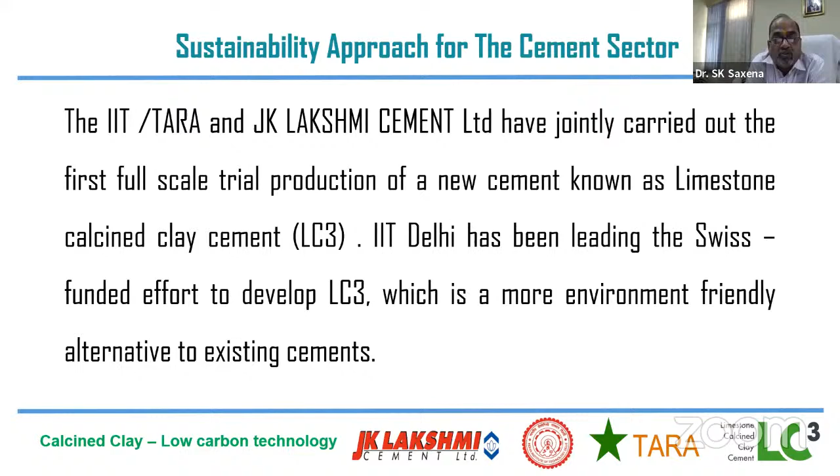Next slide, please. And of course, as we have talked about the raw material like the fly ash, slag, which is nowadays available, but as far as the commercial uses are concerned, and the cost of the material, which is day by day increasing, nearly, if I am correct, in industry, the fly ash landed cost which we are receiving for utilizing and making the blended cement, it has already crossed more than 1,000 rupees a ton.

Calcined clay is the option, of course, for the future of cement manufacturing due to the increasing levels of the supplementary cementitious material like fly ash in the production of cement. But the availability is now becoming an issue, and it is low compared to the demand of cement, because normally we are shifting from OPC to PPC very fast.

Calcined clays are the only other material that are potentially available in large quantity in India, which has already been mapped by Mr. Soumen Maity, and the data already reflect that ample amount of quantity of calcined clay is available, which we are looking for the calcination, etc. And one more thing, beautifully he has mapped the deposits of clay in and around the integrated plant. So we can see the ample quantity already is available in the country.

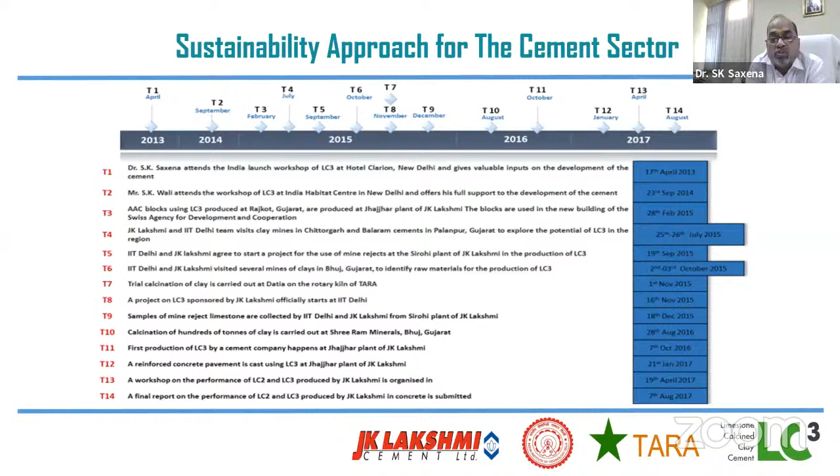This is the journey of manufacturing of LC3 at JK Lakshmi Cement, Jhajjar. It is a sequence of 4 years, I would say 4 years of rigorous work on that in a planned and systematic way in collaboration with TARA and IIT Delhi. And we could conclude the production in 2017. Next slide, please.

So this is the approach we have adopted as far as the production of the LC3 is concerned. The selection and the quality of raw material was the first foremost thing, where we have scouted a number of reserves available in the western part of the country. Then we found that the calcination facility was also available there. First of all, we scouted the sites, then collected the raw material, got it tested for the suitability, etc.

Then at the site of the clay deposit, we did the calcination, maintained all the parameters. That was a difficult task, of course, because it was a conventional type of kiln where it was very, very difficult to maintain the required temperature, etc. But with our past experience of kiln operations, we could manage it. And proper quality has been calcined, and characterization has been thoroughly done in a collaborative approach, particularly using the facilities at IIT Delhi.

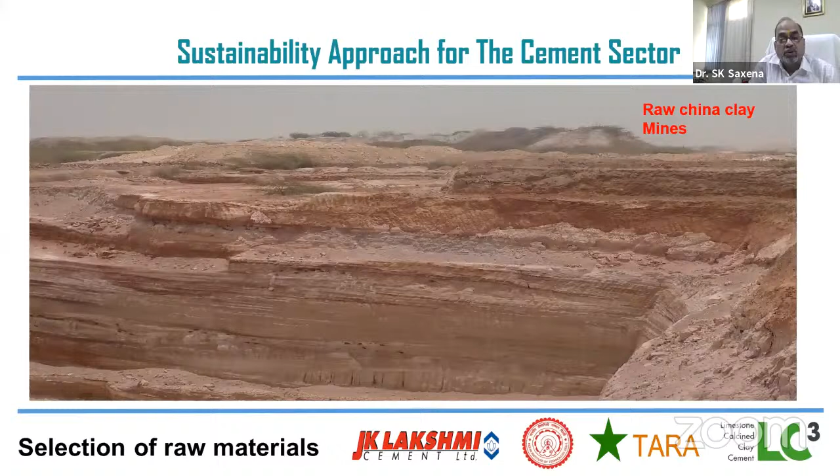Then we have shifted this calcined clay from that place to the northern part of the country where our plant is. And most importantly, the limestone which has been used for making LC3 is purely the mine residue available at our integrated plant at Sirohi, Rajasthan. The ample quantity is available, which has been shifted to our grinding site, and then it was used to the tune of 15%. This is the view of the raw China clay mine in the western part, from where we selected this material for the calcination. Next slide, please.

So this is the chronology: raw clay excavation from the mine, then sun drying of the wet clay at the mine to remove the moisture to the extent possible. Then it was transported from the mine to the calcination site where the kiln was available. Then it was purely conventional feeding through the conventional elevator to the inlet of the kiln by the hopper. Then the calcination was taking place with the conventional method, using pet coke, etc.

And after that, some rejection was there, but ultimately we could achieve the required quality of the clay with a certain percentage of kaolinite, and then it was tested at IIT Delhi, validated, and then shifted. Next slide, please. This is the view of the conventional kiln, and this belongs to Shree Ram Minerals, Bhuj.

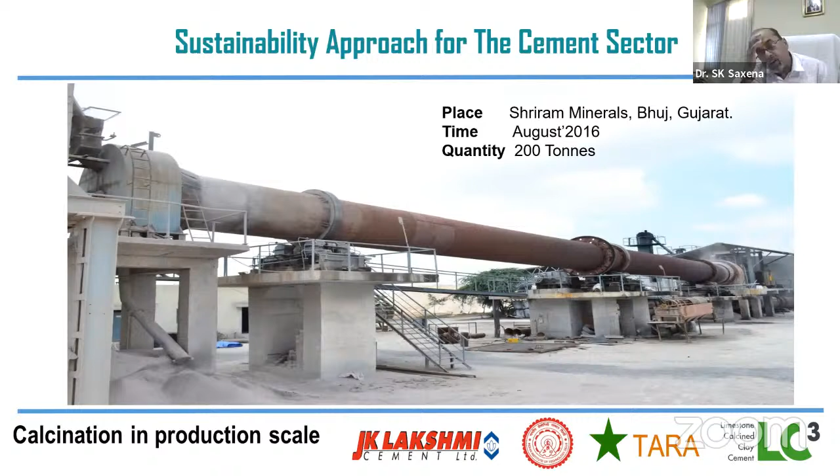Right. Next slide, please. These are some of the glimpses of that site where we have shifted the clay, then the view of the calcination, etc. The final product which has been arrived at after the calcination process, then it has been packed in the bags and it has been shifted to the site of JK Lakshmi Cement.

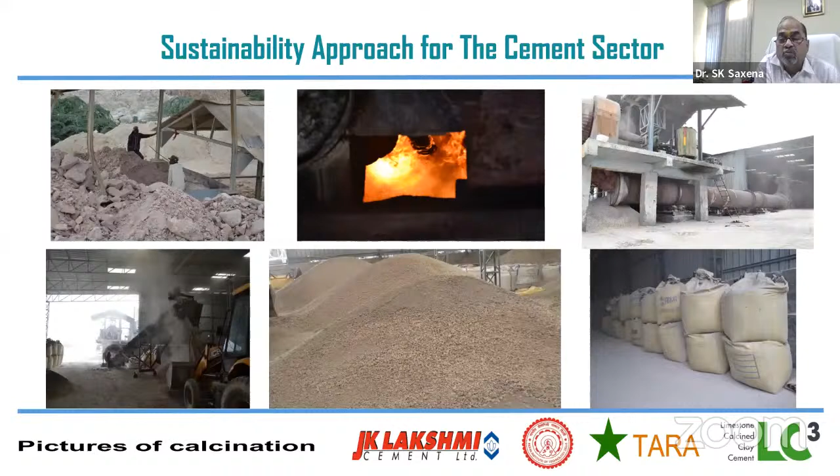This is the plant of JK Lakshmi Cement split grinding unit having 1.5 million ton capacity per annum, where we have decided to execute this operation of commercial manufacturing of LC3, where we have 2 mills operations, and where we have used this calcined clay. Of course, the clinker was available because we are already producing cement there.

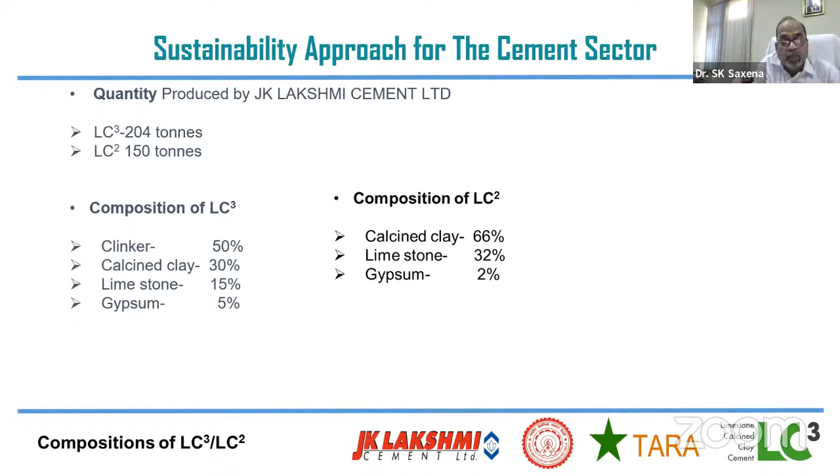And the composition which was used: 66% calcined clay, limestone 32%, and gypsum; it was an LC2. And in LC3, the clinker ratio was 50%, 30% was calcined clay, 15% was mine residue, and gypsum 5%. So there were some assumptions and some confusions as far as the grinding operation was concerned, but with our own experience we planned this activity and successfully commercially produced 204 metric tons of LC3.

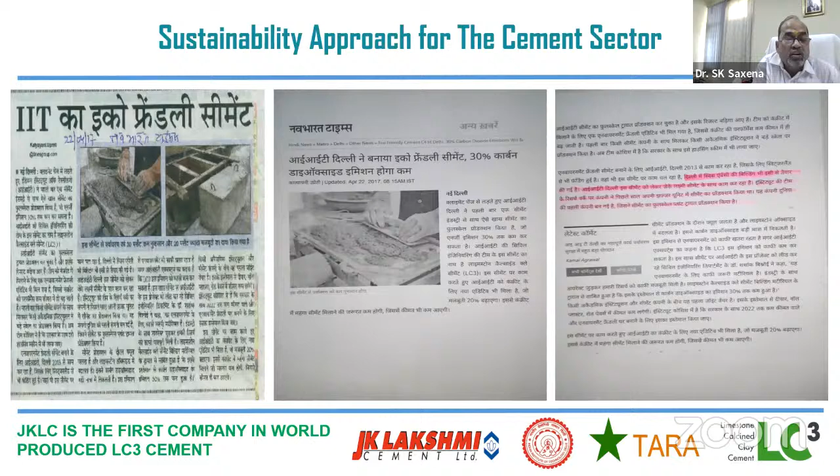Yes, please. So this is the view of the site of calcining the clay, where we have done it at Bhuj. So the team of TARA, IIT, and JK Lakshmi Cement were there for at least 3 days continuously. These are some of the media reports, etc., which have been published, of course.

And one of the most important things which I would like to tell is that this LC3 we tried also in manufacturing of autoclaved aerated concrete blocks, where we have an entity of 500 meters cube per day in the same premises of JK Lakshmi Cement grinding unit at Jhajjar, and we are regularly producing autoclaved aerated concrete blocks there. And there was a demand of autoclaved aerated concrete blocks for making an administrative block of the Swiss Embassy, and we produced these AAC blocks with 100% replacement of OPC by LC3 in the same proportion, and we supplied around 145 meter cube.

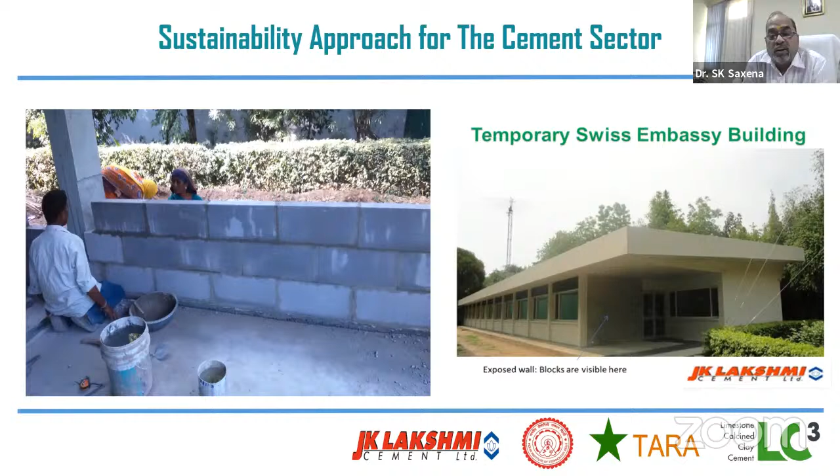And this building has been built with the exclusive use of this AAC block, manufactured with the use of LC3, replacing ordinary Portland cement. Now, this is a green building, and this is a photo which has been taken at the time of inauguration of that administrative building in the Swiss Embassy. So this was all about the achievement of commercial LC3 production, first in India, by JK Lakshmi Cement Limited at our Jhajjar grinding unit. So thank you very much.

Most of the points have already been covered by my friend, but still we are progressing very well as far as the net zero target is concerned. Industry is doing very well, and the hard work which has been done by TARA and IIT academia like IIT Delhi, IIT Chennai, has definitely supported the cement industry. Now it becomes our duty to create awareness among the customers, because it will be a new generation cement, a new variety of cement, of course, in the category of blended cement.

And definitely we look forward, as Professor Karen has already mentioned, now there is a need of scaling it up, and speed is required, definitely, because of the way we have taken it forward by the different steps, where academia has very much helped industry by drafting the LC3 specification, etc., and put it to the national agency like the Bureau of Indian Standards. Many discussions have taken place.